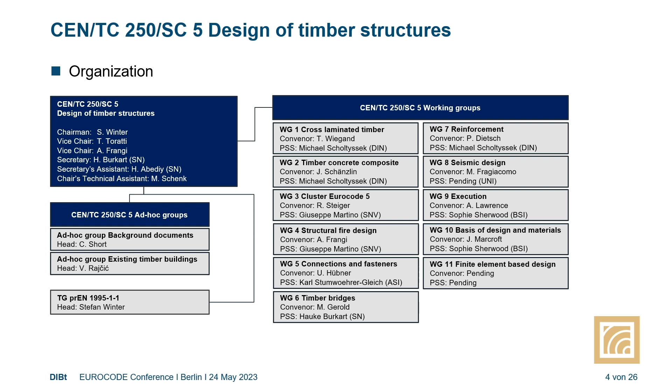Finally, we have an ad hoc group about existing timber structures. You heard about that in Nick's report about 1991, existing structures. At the same time, working group 2, under the convenership of Mr. Lang, is dealing with existing structures, and we are supporting this, of course.

As a summary, in total the Eurocode 5 family has 5 parts. The new ones are part 3, timber concrete composite structures, currently available as TS 19103, which will now be transferred to 1995-1-3. We have part 2, bridges, and a new part 3, execution. The general rules and rules for buildings, the fire design, and the bridges were all revised.

What are the targets? Of course, harmonization with the whole Eurocode family. Timber concrete composites should be harmonized with Eurocode 2 and Eurocode 4, for example, in some aspects. And of course, we have to mirror the tremendous development of timber structures in the past 30 years.

It's related to the size of the buildings. We nowadays create high-rise timber buildings with a height of 100 meters, actually built. The total size of timber buildings is rising, with a lot of multi-story flats, for example, built in timber nowadays.

Therefore, we need an extension and revision of several rules for timber design. In addition, we want to improve the interface between EN 1995 and product standards. This is of major importance for us, and I will come back to this a little later. Of course, same targets as everywhere: reduction of nationally determined parameters and alternative design methods, and finally outsourcing very specific design rules from the main text body to normative annexes, to make it easier to navigate — also a part of ease of use.

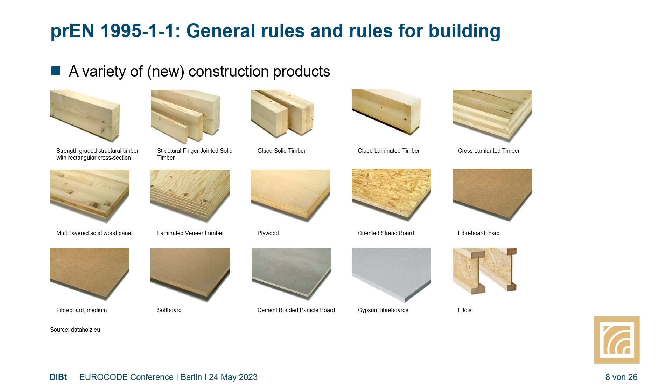Compared to steel or concrete, it's a little more complicated. In addition, there's been an enormous development in the connection sector.

We have not only smooth nails or ring shank nails, but a high number of different types of screws nowadays, fully threaded, not fully threaded, etc. Of course we also have dowels and bolts, as we had in the past. But there's a high variation of connections, connectors, nails and screws available on the market, and we need design rules for them.

In addition, and that's nice, we have a revival of carpenter joints. Why? Because especially in the timber sector, we have a really high amount of CAD and CAM-based manufacturing. Based on CAD and robotics, we are able to produce very precise structures, and therefore we are nowadays again able to use these connections, which are no longer handmade — they are produced.

This all leads to a high amount of new content, and unfortunately I'm not able to go through everything today in detail as some of our colleagues did. It's too much, so I would like to stick to the principles and some examples of the new content.

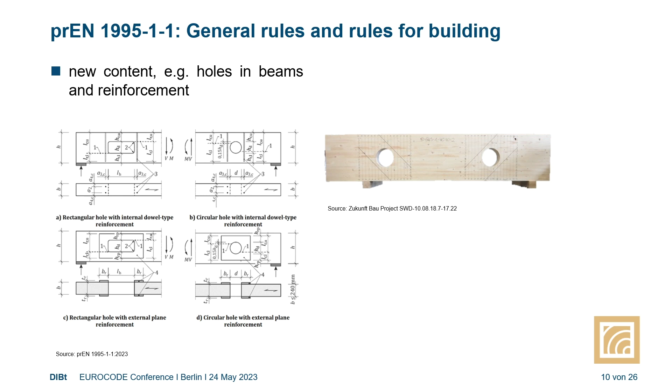As you have seen before, we have an increase in the size and height of buildings, and therefore you end up with more complicated structures to take lateral loads. You need a combination - CLT walls combined with timber framed walls, and often with concrete shafts and staircases out of concrete. You have to combine that, and you need some rules for it. That's what we tried to integrate.

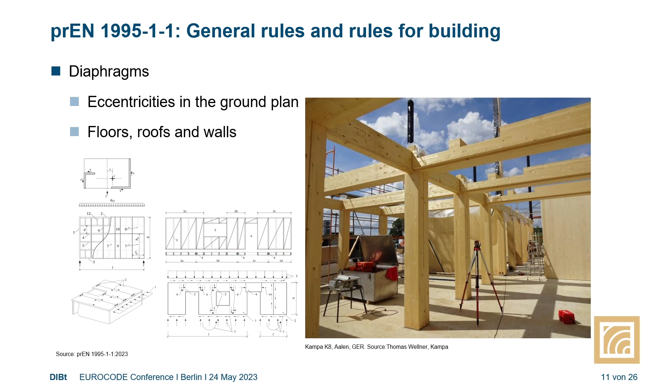We outsourced some content, especially to normative annexes. For example...

Foundations with timber piles - that was a special request, not from Germany, but from our friends from the Netherlands, for example, or from Italy, because they have foundations like that in their cities sometimes up to now. And for example, nail plate structures - these design rules are mainly used by software companies writing design programs or specialists dealing with these structures. So we moved it out from the main text body and put it in a normative annex, because as you know, the Eurocodes are implemented finally in different countries, and it's a different process. But if the annex is normative, then normally it's also valid under the application of building regulations.

Let's leave part 1.1, the normal temperature design, and come to fire design. Again we have, as an example, cross-laminated timber - a mass timber product built up of crosswise layers of boards. That's why the charring behavior is a little different compared to solid timber or glulam. That's what we have to take into account in fire design.

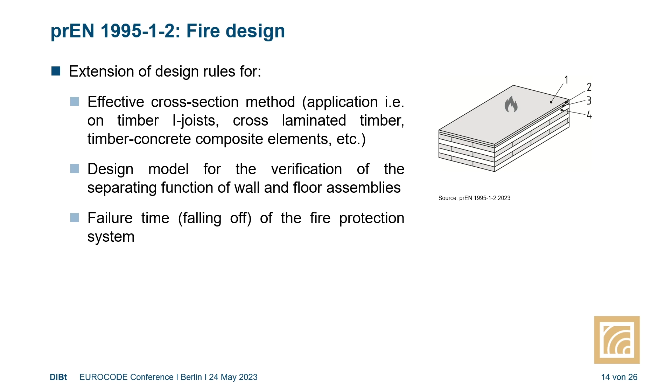We had a number of revisions of design rules. Charring, for example - we have this famous step model, especially valid for cross-laminated timber, because layers fall down and then you have preheating of the next layer, and the charring rate is increased for a certain time span, then goes back to the normal charring rate. This is now integrated. We have an update of timber frame assemblies. Connections in fire also now have design rules for 90 minutes fire resistance, which was limited before to only 60 minutes. And detailing for the case of fire was improved, as well as the design of timber structures exposed to physically based design fires.

This connects us now to what Nick mentioned this morning. Annex H in 1991-1-2 gives the fire loads, and Annex A in 1995-1-2 provides the design rules under natural fire exposure.

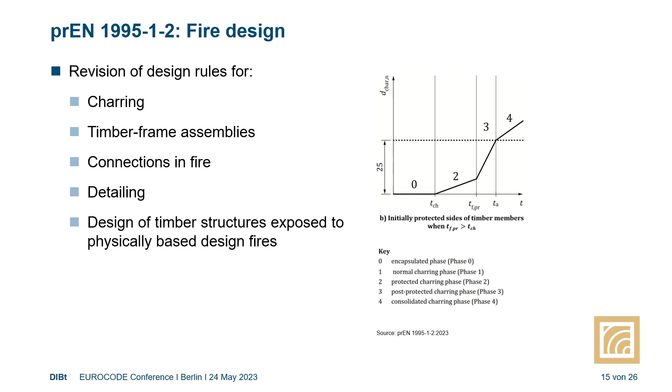Timber concrete composite structures. As mentioned before, this is a high increase. We use it mainly for wide span floors, sometimes also for walls, but mainly for wide span floors in offices, in kindergarten, in schools, etc. And of course also in multi-story dwellings.

Especially, they provide also a very good fire protection because you are producing always a complete non-combustible layer, and then the next layer of timber is following again.

Sometimes built on site. These are pictures, quite old pictures from Berlin, from Esmarchstraße in northeast of Berlin, where one of the first multi-story buildings in timber here in Berlin was built. So sometimes on-site, very often nowadays also delivered as a construction product, prefabricated in a factory, and then coming to the building site, the whole element. And with the typical technology of concrete, then the gaps are closed by screed, and that's it.

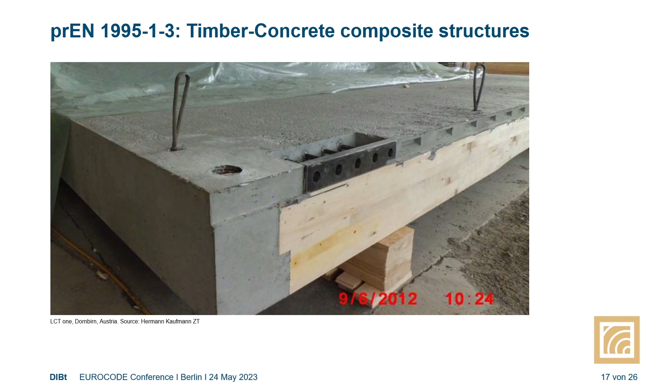We have already a pilot stage based on TS 19103. We give there the load carrying capacity and the slip modulus of the connections with dowel type fasteners, bonded in rods or notch connections. There is a modification of creep coefficients for composite action and slab systems and in beam systems, and we have also a calculation method for the effect of inelastic strains and some other hints for detailing.

Personal hint: you have to use the correct concrete, not the cheapest one you have available. So, of course, you need also a very good concrete design so that you have low creep, for example, and therefore low deformation. And if you build this, it's not only necessary to have knowledge in timber structures, you also need a good knowledge in concrete structures, of course.

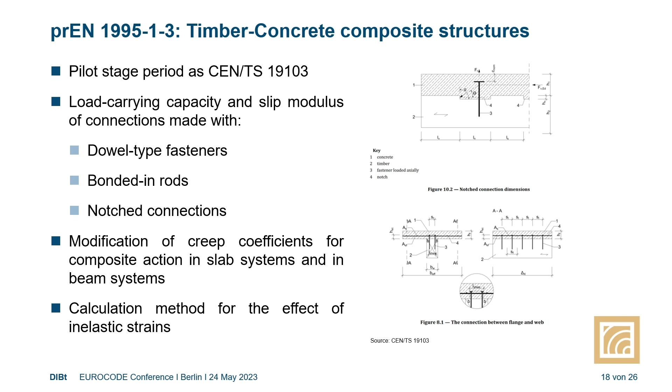Bridges. Well, we have some very old timber bridges in the foreground. You see a more than 150-year-old railway bridge in Benneckenstein, which was a repair situation here. But we have a lot of modern bridges as well, out of timber, especially in the alpine area, but also more and more in other areas.

We extended the design rules for durability and detailing because moisture is a bigger enemy than fire, to be honest, for timber structures. And that's why you have a lot of detailing now also in the Eurocode to provide dry timber structure for a long lifespan.

We have new design rules for deck plates and also first time for integral bridges. And we revised the design rules in the bridge part for timber concrete composite, of course, in relationship to 19103. We integrated laminated veneer lumber, vibrations and damping, and also some additional fatigue rules. By the way, for fatigue, we have now also a chapter in part 1.1, because if you think about the high-rise buildings, they also have sometimes fatigue design situations, of course.

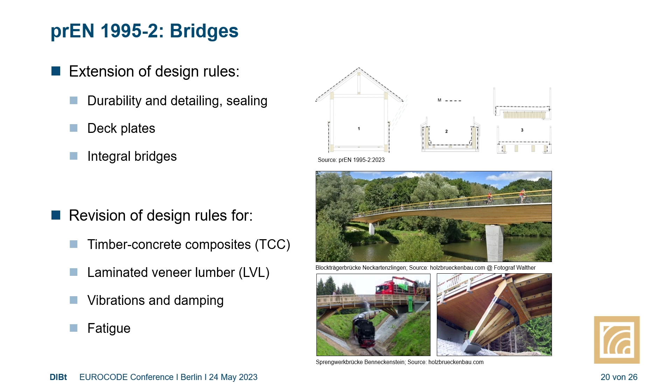Execution. Not available before. Now, well, we had some very small part of execution rules in part 10 of part 1.1, and we agreed at the beginning of the work in TC 250 that we will put out all the execution rules from the main parts of the Eurocodes. That's why here now 1995-3 execution, where you will find rules for the tolerances in connections, for the tolerances for member dimensions, the tolerances of erected members and moisture control.

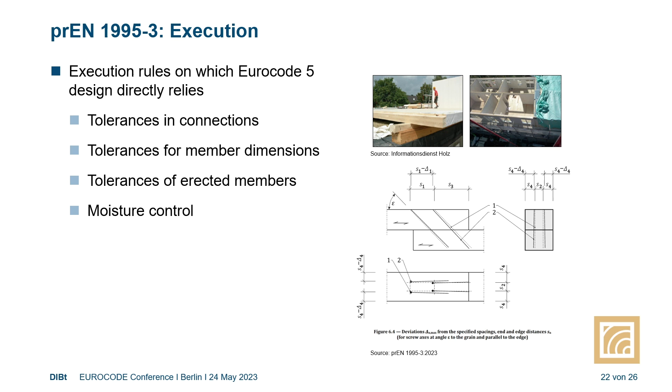Finally, that's the same with the material. We have to ensure on the building side that what is designed is built and that the design fits to what is built finally. And therefore, we give, of course, the rules in the execution standard.

So, coming to the end, again, a conclusion. You see 5 different parts in future, 2 new ones, 3 revised ones. And I would like to end a little bit with a hint to a discussion which is, I think, always ongoing. And that's a discussion of number of pages.

Is ease of use related to a reduction of number of pages? I think the answer is definitely no. What you have seen, we have a really enormous development seen in the last 20, 30 years in timber structures, based on a lot of research, based on a lot of additional practice. What we want to do is describe state of art. And if the state of art developed in such a way, you need a little bit more pages to describe it. I have no other idea.

And that's nothing to do with ease of use. Of course, in addition, we agreed that the first 10 chapters of all Eurocodes have the same numbering and the same heading. This is also part of ease of use. Those who are not doing steel design on a daily practice, they know they find the information in the same chapter in Eurocode 3 as well in Eurocode 4, 5, 6, etc.

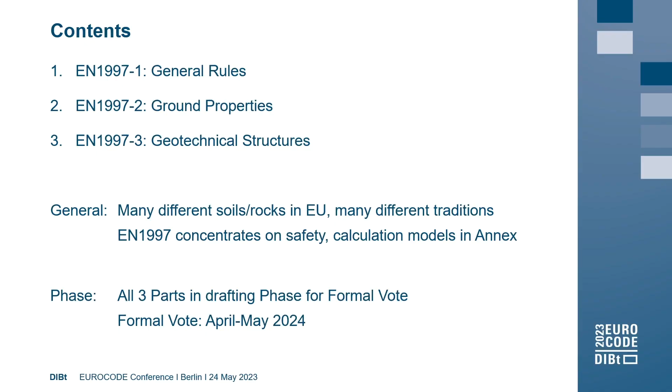Also the ways to compute your safety, the different calculation models, are different, and therefore we concentrate on safety. We have a lot of calculation models, but they're in informative annexes. At the moment, all 3 parts are in the drafting phase for formal vote, and at least the first 2 parts will have a formal vote in April, May next year. Part 3 probably comes half a year later.

The main changes in Eurocode 7: in the old days, we had 3 books on our desks - EN 1990, Basis of Structural Design, I must say, also geotechnical. Part 1, dealing with the general rules and also with geotechnical structures. And Part 2, dealing with ground investigation and testing. In the new Eurocode, I think Paolo already mentioned it, we have on our computer, of course, 4 parts.

The first one is basis of design, structural and geotechnical design, as Paolo already said. Then there's a general rule part, a part 2 on ground properties, which has a different focus on how you derive your properties and is directly addressed to the designer, and a part on geotechnical structures with many calculation models in the annex. So there's 4 different parts.

And then, of course, what is it? It delivers you a toolbox, as given here, for the designer, and in that toolbox are the 4 parts. But what you want with it is to get your structure ULS safe. In SLS, your deformation should not be too big, because that's very important for the geotechnical engineer. But also, it should be durable, robust, and sustainable - these aspects, as the others have already introduced, are also in Eurocode 7.

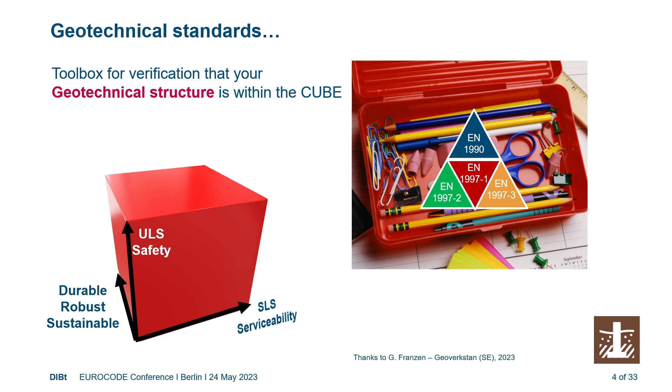So actually, it's not a 2D thing, but a 3D thing - it is a cube. And so we should take care with Eurocode 7 that our structure is inside the cube. Part 1, general rules.

Key changes. In the old version we had a geotechnical category, and it was not completely clear what it was. The difference is: for structural items you have a consequence class dealing with function of the structure. Whereas here we have a second component, because there is the soil. You can't choose it, it's there, and you have to look at the risks.

Representative value determination. Soil parameters are very different, and if you do tests, the range of parameters can be widely spread. So we adjusted a way to get to representative values, by engineering judgement or by statistics. We must also be prepared that in the future we'll deal with huge databases of test results.

Groundwater, the hidden killer of lots of structures. It's an important issue also here in Eurocode 7 Part 1. And then safety numerical methods. It was already mentioned in other Eurocodes, but for geotechnical we do a lot of continuum mechanics, and there we need extra rules.

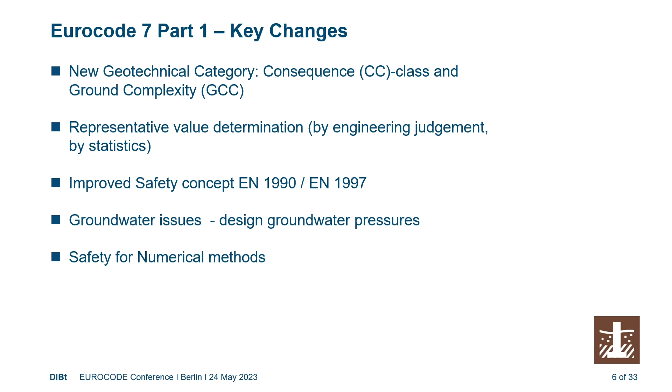So the first one, geotechnical categories. We made a concept of a consequence class, described in Eurocode EN 1990, and a ground complexity class. The ground complexity class is a function of the ground. If you have a difficult ground, a quick clay, or a very soft one, or whatever, you end up in a different complexity class. The two you combine, as you can see in this matrix: here's your consequence class, this is your complexity class. Lower, the simple ground, say sand, and higher a peat or fissured rock or something.

Combining them, you have a geotechnical category 1, 2, and 3. Those three things determine whether you have to do lots of ground investigation, or how you have to validate your calculation models, your monitoring, and it's also connected with EN 1990, with design check levels and inspection levels and so on. So in this case we have increased this phenomenon of geotechnical category compared to the previous one.

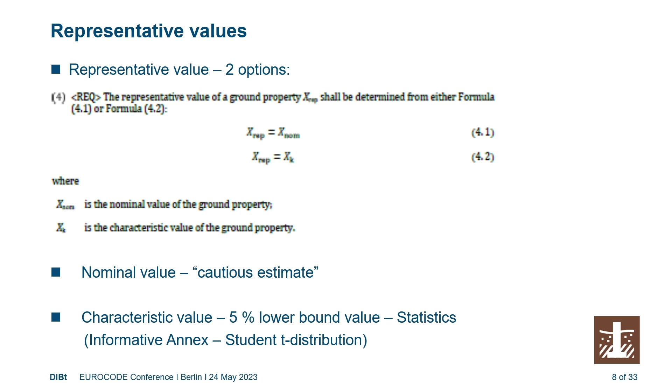But for a slope, it's different, because the permanent action of the slope itself, the mass of the material, works as a load, but it also works as a resistance, because the bigger the mass, the bigger the resistance. So luckily there is VC3, where the factor on permanent action is 1 and on variable action is 1.3.

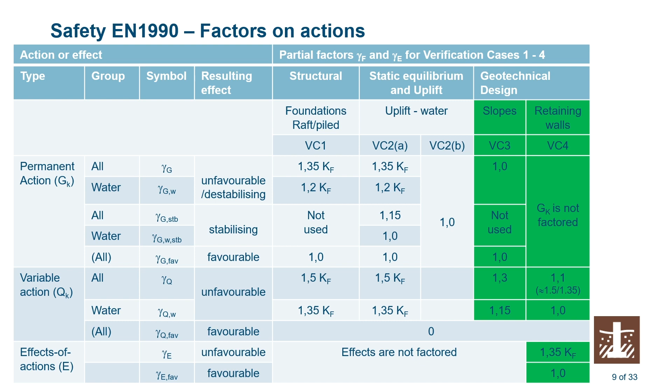So all the permanent actions are not factored. The variable action is factored by 1.1, which is the difference between the 1.5 of variable and the 1.35 of permanent. Then at the end you have a result, an effect of actions, and you factor it by 1.35. So that helps us in geotechnics very much to analyze our structures.

Material factors. We have two sets of material factors in Eurocode 7. One set is all 1, which goes with VC4, which I just discussed, and the other set has material factors, and it goes with VC3, where you have no permanent load factor, but you use material factors to make the difference. And of course there is an adjustment for consequence classes, as also in EN 1990.

Groundwater is very important for us. It's important to have the right value of your groundwater level. What you normally get is some kind of readings, and you don't know what to take - the upper one, the lower one, or something in between. We have written a chapter on this, on how to derive the representative values of a groundwater pressure.

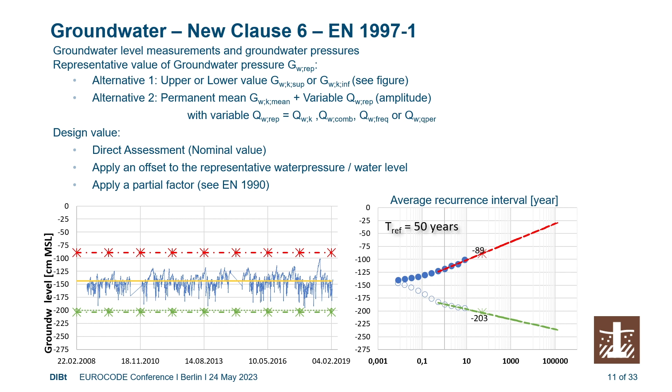You can do it two ways: take the high one or the low one, or take the average and take the amplitude. Those are the two possibilities. Then you go for a design value. You can do that directly if, for instance, there's a dike which cannot overflow and you know that's the maximum. Or you can apply an offset, or apply a partial factor. Of course there's some statistics behind it, and that's described.

Another important point is how to deal with numerical methods. We had quite some discussions in Eurocode 7 about how we would tackle that, because normally we work with analytical values and we know where to put the safety factor. So we ended up with two possibilities. One is dealing with input factoring and output factoring - you make two calculations.

For instance, with a retaining structure with input factoring, what you do is reduce the strength of the material until failure occurs, and the reduction is your safety margin. The other one is output factoring.

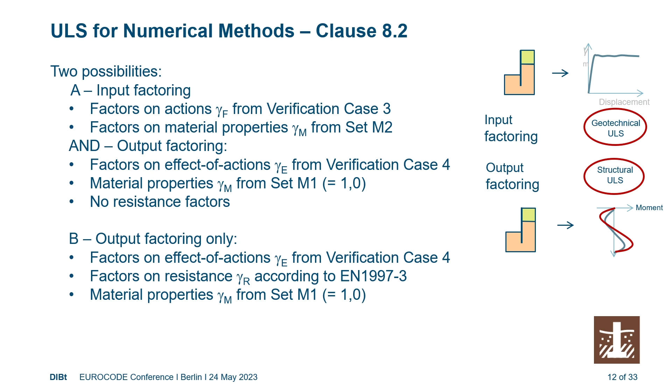It's actually verification case 4. You put all the material factors on one, calculate your bending moment in your sheet pile, and put the resistance factor on your moment and effects of actions to derive at it. Also, you can do it by output factoring only, but then you need an effect-of-actions factor from verification case 4, plus an extra factor on the resistance. So those two options, A and B, are available.

Ground properties, Eurocode Part 2. A key change is that in the previous version, we had a description of testing with references to testing standards, and from that there were some annexes on how to derive your properties. What we did here is recognize the designer needs the properties - he's not interested in the test, but wants the property and how to get it. So we have a property like stiffness and how you get it from a triaxial test, a CPT, or another test, all in the same ballpark. That's how it was organized.

Furthermore, we have three other chapters: one on the ground model, which I'll show next, planning, and ground investigation methods, with a brief description. Here are all the chapter headings with the various properties.

The ground model is something new. It's more a concept than a real model. It gives all the information you need when you are going to design a geotechnical structure. So what you need is the geodetics - how your structure looks, if you have a slope on the left side - but also the results of the boreholes, the CPTs, everything. Based on that, you can make a schematization and characterization of your ground.

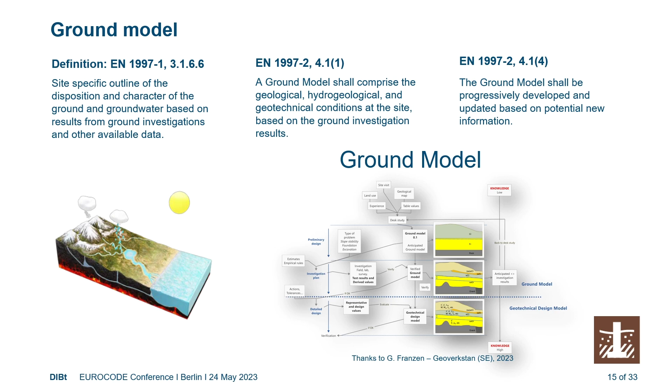You start rough, but if you have more investigation points, you see different layers existing, and you get the properties in. This is something developed in the design - it can be a report, a drawing, a database, but it's a conceptual thing you need before you do your analysis.

Then the derivation of ground properties - as I already said, there are six or seven chapters with parameters, all similar. We've given tables on how we derive these properties from soil strength tests. So this is the peak effective cohesion - what kind of test, where you can find it, and some comments. There are also correlations for indirect derivation - so if you have a CPT, you measure the cone resistance, and from that you have a formula to get your friction angle. That's given in all the annexes, so it's very handy.

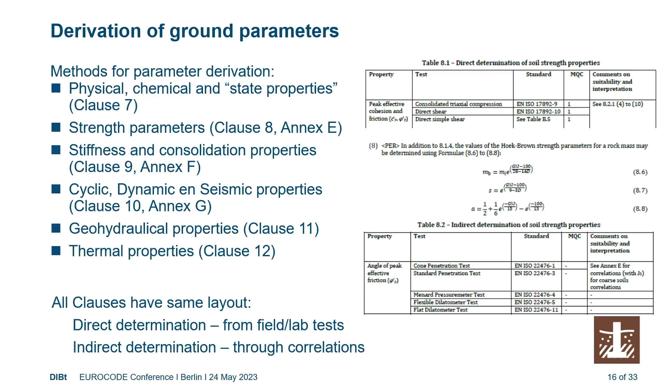Then we come to Part 3, which deals with geotechnical structures, and we have quite a number of new ones. We've introduced pile groups and pile rafts in clause 6, reinforced fill, soil nails, ground improvement - improving the properties of the ground - groundwater control, and rock bolts, all new. We also completely updated slopes, spread foundations, piles, retaining structures, and anchors.

I will just go briefly through the structures. Slopes - the engineering is quite common, and it's one of the things we all do the same way in Europe. So that's great, it's harmonized, it works. We have only one design material factor approach - we use VC3 with material factors, and that's it.

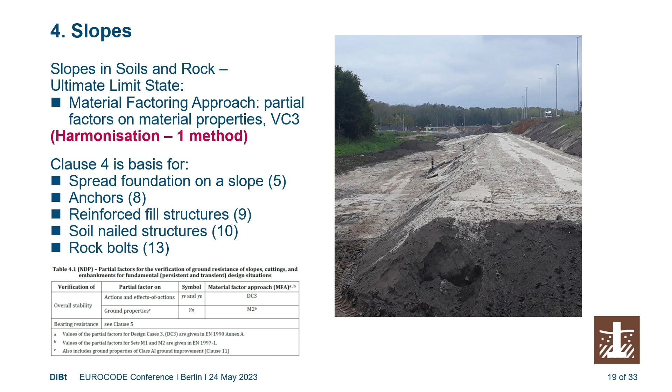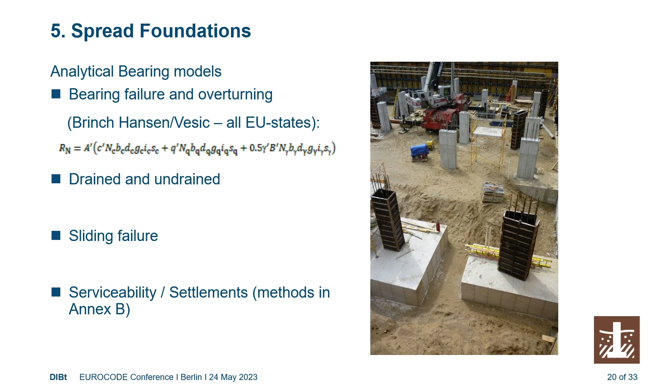Spread foundations - the good thing is, like concrete slabs on the ground, we have one bearing capacity formula which we use everywhere, so we put it in the main text. We look at drained, undrained, sliding failure, and settlements.

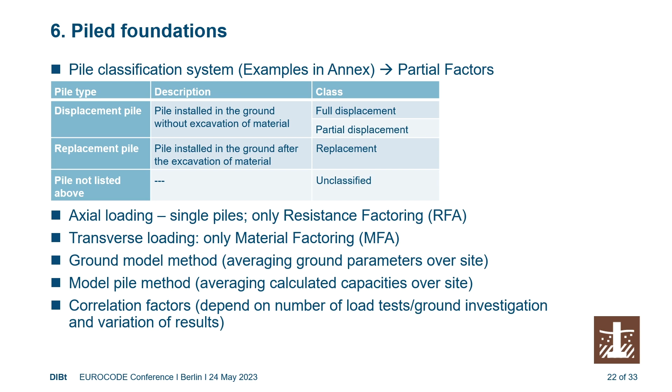A new topic is pile groups and piled rafts. We do the ULS verification with material factors and resistance factoring, and we have some models for bearing capacity in groups, and also a model for negative shaft friction.

Retaining structures - also there we have different models. There's analytical models, that's a beam with springs next to it, but also continuum models where you have finite element continuum models like Plaxis and so on to analyze it, and both are common practice nowadays. Some parameters for active passive pressures have different material and resistance factors. Often both checks are necessary.

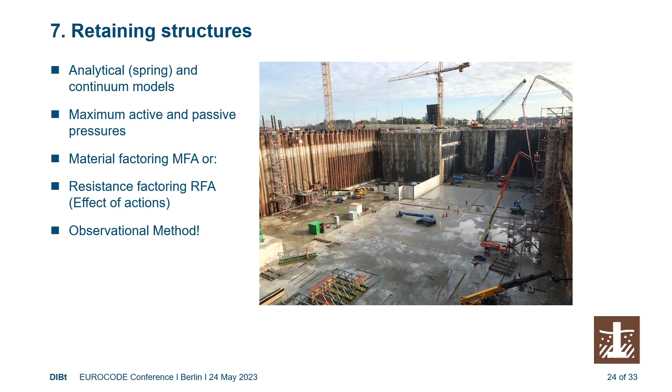What's also new is we have a section on the observational method. The observational method is a way to optimize your structure by looking in the design at different scenarios. You make different sums with different scenarios, and you say I'm going to monitor everything, and if my monitoring shows I have to do something else - for instance for a retaining wall, put in an extra strut or an anchor - I can do that, but I don't do that in the beginning. That way I can optimize my structure and make it cheaper. That's described especially for retaining structures.

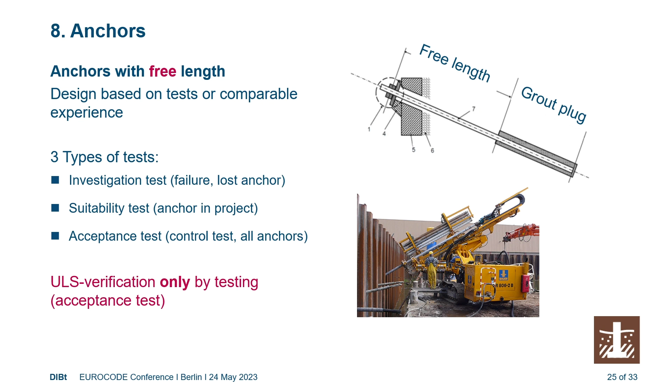Anchors are characterized as anchors with a free length. There's a lot, for anchors especially grouted ones, it's very much execution dependent, so all verification is in the end done by testing. Every anchor has to be tested with a proof load.

Reinforced fill structures - a new topic where you have these kind of terre-armée structures, concrete facing with anchors in the fill, or a geotextile which is bent back to take the load. This is now in the rules for designing them in Eurocode 7.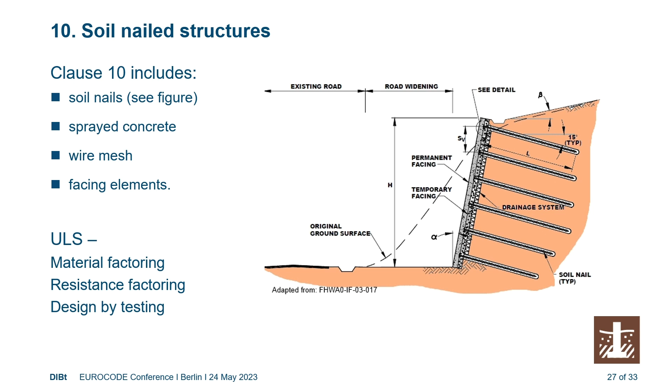Soil-nailed structures, similar, also to get a very steep slope with nails, with a covering of the face - again, now dealt with.

Another big chapter is on ground improvement, and there we have two different methods: diffused methods, where you completely fill up the ground with concrete, or you densify it or improve it. The other is a discrete method where you put columns - stone columns, sand columns, or jet grout columns.

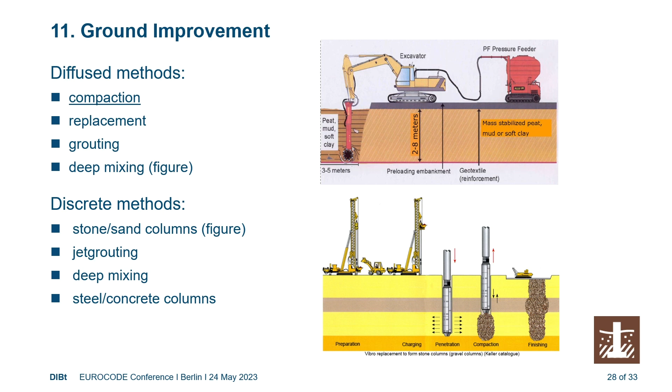Also design rules, and because there's also an overlap with piles - what is a concrete column and what is a pile - these things are taken into account.

Groundwater control, another chapter dealing with drainage, so pumping, getting water out, but also with sealing the ground by grouting.

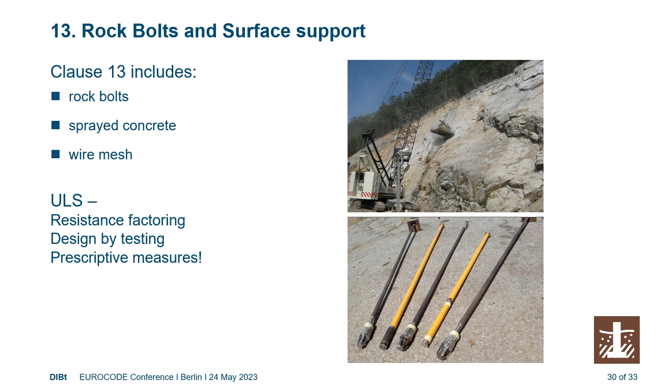And the last chapter is on rock bolts, to keep the rock surface stable with bolts and sprayed concrete, and wire meshes are also included there.

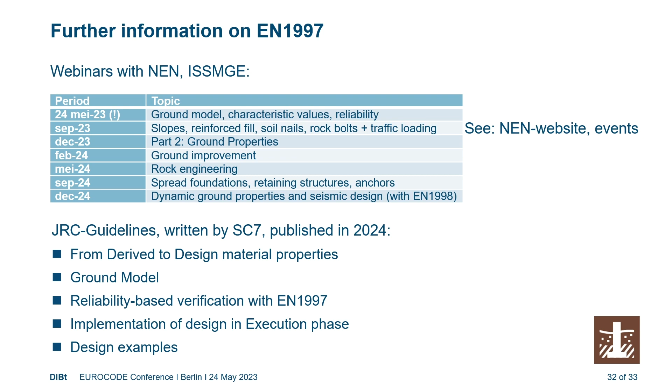And also, we talk a lot about monitoring plans and execution plans and things like that, but how does it work in the execution phase? We have a lot of examples where that is given. And lastly, we have made a lot of design examples to check the code. That's where I want to finish my lecture. Thanks very much.

Thank you, Mr. Van Seters, for providing us with a toolbox for geotechnical design. Natural disasters like the earthquake in Turkey and Syria remind us of the importance of seismic design and its consistent implementation. Philippe Bisch will give us an update on the latest Eurocode developments related to earthquake resistance.

Thank you. So I'm very glad to be here again in Berlin, and also to listen to my colleagues, because, as you know, Eurocode 8 complements the other Eurocodes. So we have to know every other Eurocode to be able to develop Eurocode 8.

So I've been involved in the development of Eurocode 8 since the beginning of the ENV stage. It was in the last years of the 80s, so it was last century. The interest of that is I could follow the development of Eurocode 8, of course. The physical basis are still the same.

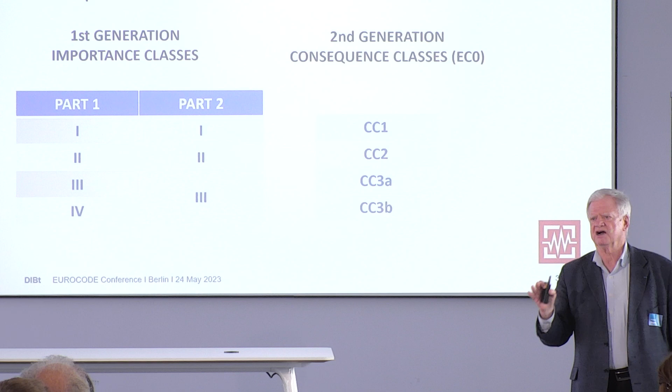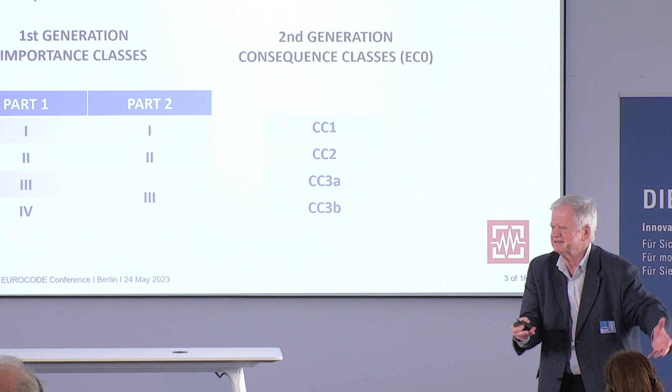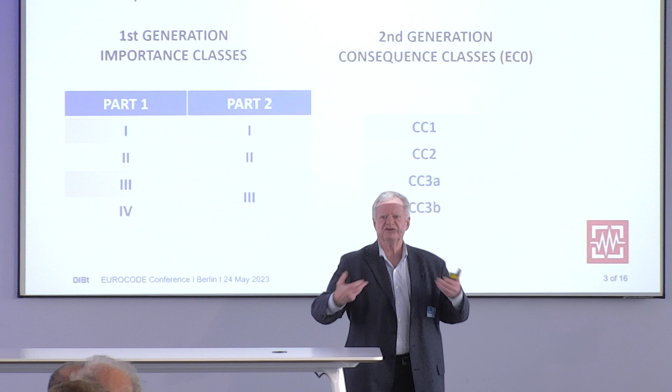One of the problems of Eurocode 8 is that it is very often, in many countries, directly in relation with regulation. So on one side you have Eurocode 8 and the national annexes, but you also have all the regulatory texts that exist. This is a constraint, because we cannot only develop what we want; we also have to take into account the final decisions taken at a political level, mainly related to safety. It happens that in many legal texts you have a clear definition of these categories, so we could not change them, because we cannot change the law. We can only change Eurocode 8.

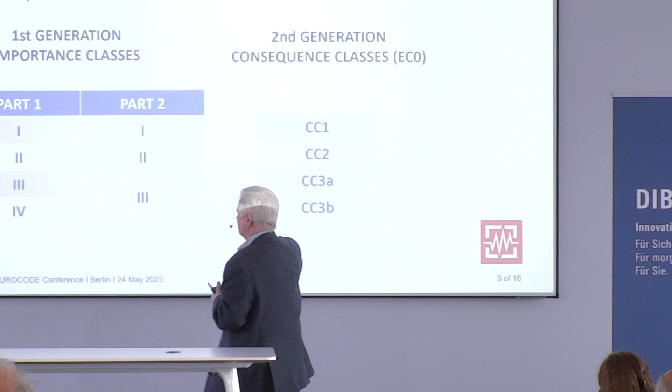So what we have done, just to mirror these categories, is to divide CC3 in two, which was authorized by Eurocode 0. We decided to divide CC3 to cope with categories 3 and 4. I insist on this: we are working in a legal environment, and we are not only talking of technical text, we also have to look at what happens after in the different member states. Of course it's not the same if you look at the legislation in southern countries or in northern countries. It's very different, but it has consequences.

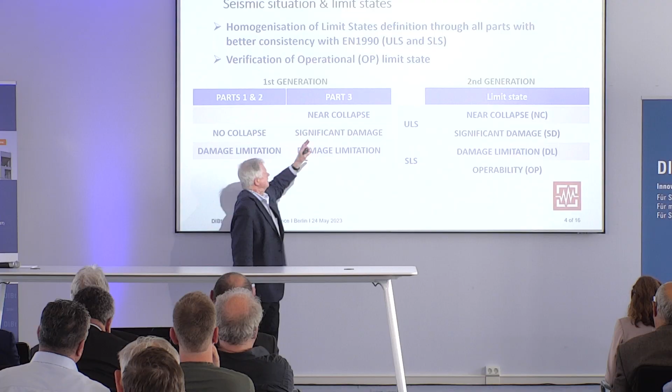Another thing: the Eurocode 8 family was not completely consistent. If you look at different parts, the limit states were different between Part 1 and Part 2 — Part 1 is for bridges and buildings, Part 2 is for bridges. For new structures we have others, but mainly those, and Part 3 is for assessment. Part 3 was developed since the beginning, at the ENV stage, for the assessment of existing structures in seismic situations. This has existed for a very long time.

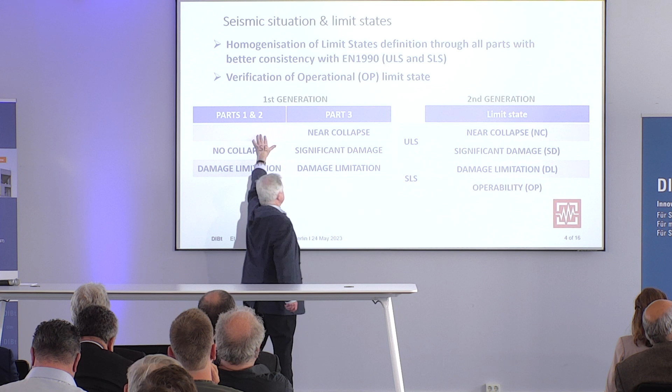We had defined in Part 3 three limit states. This one is the same as this one, even if the name is not the same, and this one is the same, but this one did not exist. Near collapse is really near collapse; here, no collapse is not near collapse — you still have some margin, of course, for new structures.

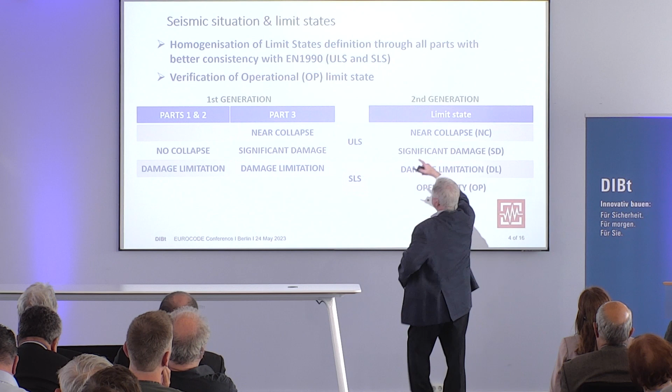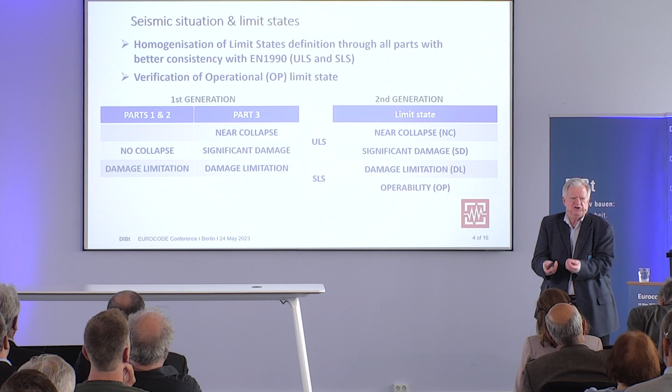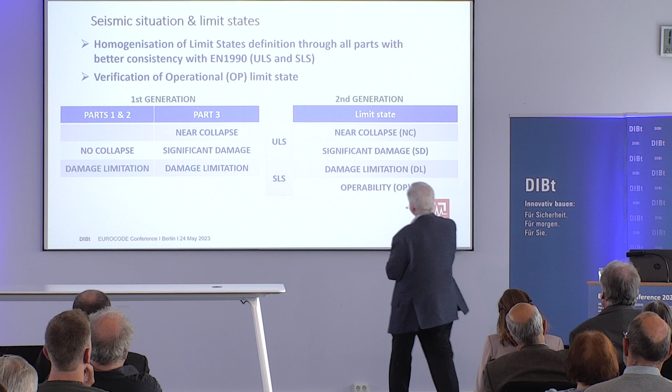So we decided to use the definitions which are better, those in Eurocode 0. And we have added another limit state, operational, at the request of some members, because sometimes for a certain level of earthquake you need to have operation for certain parts of a hospital, for instance — you need it for a situation of crisis.

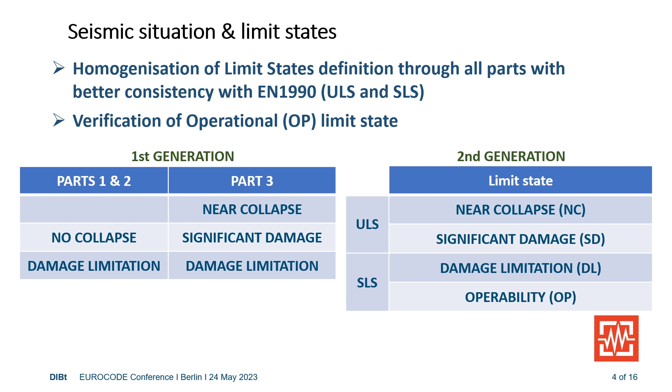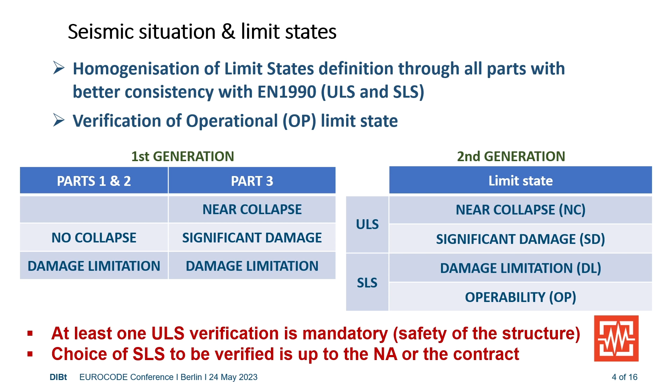So we have added that, and then we have all those limit states, but we are clearly referenced at ultimate and serviceability. Of course, all that is related to safety of people and structure is in ULS, and it is mandatory to verify one ULS, mainly this one. The others are optional — it may depend on the type of structure, it depends on the member whether they want to verify these types of limit states. This choice is in the national annex, or it may be in the project.

We have tried to concentrate Eurocode 8 only on the technical issues, and all the safety choices are left to the member, whether in the national annex or in legal text, depending on the member. So you will find only technical solutions, and to help members choose their safety level, you have different levels of choices, but which are clear. This was also a help to reduce the number of NDPs.

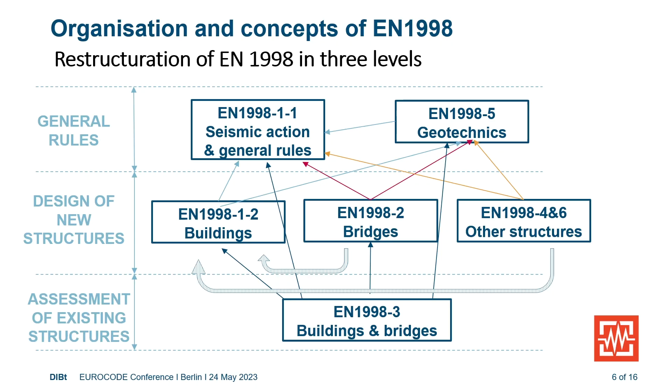We have also realized, now that we are internal in Eurocode 8, that the organization was not so consistent. In the previous generation, you had the seismic action, definition of seismic action, and the general rules together in part 1, so general rules and buildings. Then we had bridges and the other structures in part 2 and 3.

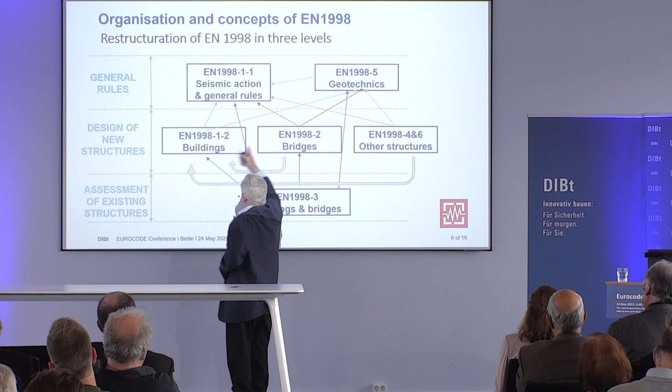What we have seen is that there were many repetitions, for instance, between part 2 and the others, and part 1. And sometimes there were even inconsistencies. So making this new organization was also a way to decrease the number of pages and to avoid the repetition, and of course to have everything consistent between the different parts.

So we have decided, and it has been accepted by TC 250, to divide part 1 into 2 sub-parts. But if you want to have the previous part 1, you take the two, glue them together, and you have part 1.

The interest is we have removed from the other parts what is dealt with in the general part. So it is a simplification. Of course, it is consistent.

And then you have 3 levels. You have the first level, mainly part 1.1, and also part 5, because we have put in part 5 all what is related to geotechnics, geotechnical structures, foundations, etc., which is common to buildings, bridges, etc. And we have kept in the other parts only what is really specific to the different types of structures.

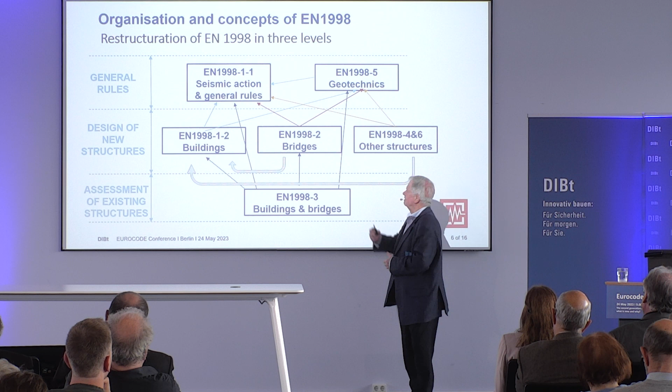We have put together part 4 and 6 because there were relatively light standards, and there was no real sense to have them separated. And part 3, of course, is important, except that in part 3 we have added bridges.

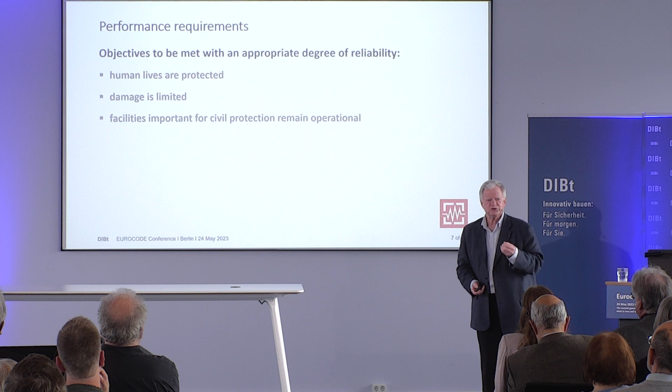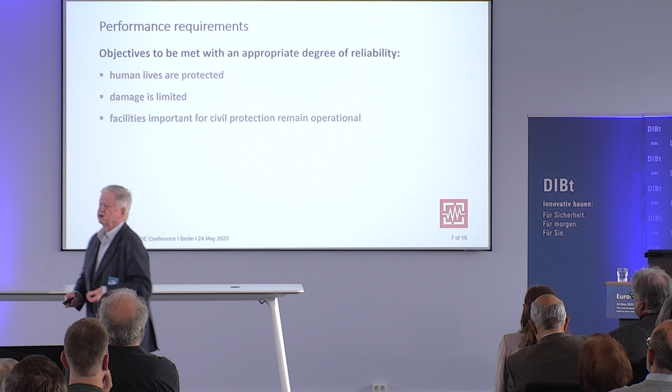What are the fundamental requirements for Eurocode 8? Of course, it is to protect human life, but also to limit the damage, because you have seen the different earthquakes on TV, and you can imagine that the loss is not only, of course the most important is human life, but not only. You have seen also the economic disaster.

So we also have to protect somehow the structures themselves. And of course, we have to take care of civil protection, because when you have an earthquake, you need civil protection. There are other considerations, and it is open.

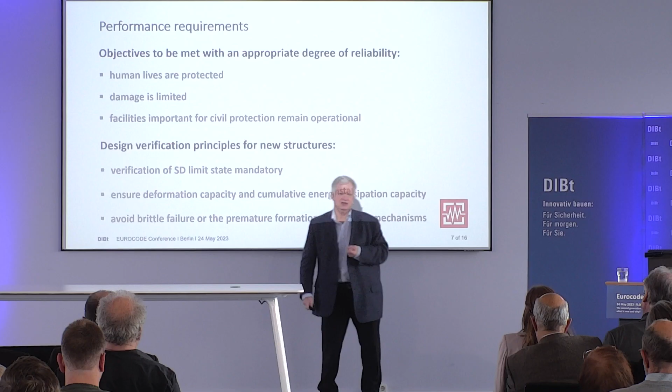Now, the design verification principles have not really changed since the first generation, because it's basic physics, I would say. So for new structures, for existing structures it's a little more complicated, but for new structures we have the verification at significant damage. Beyond this, in the development we are also making sure we are covering near collapse, but it is not a verification to be done by the designer.

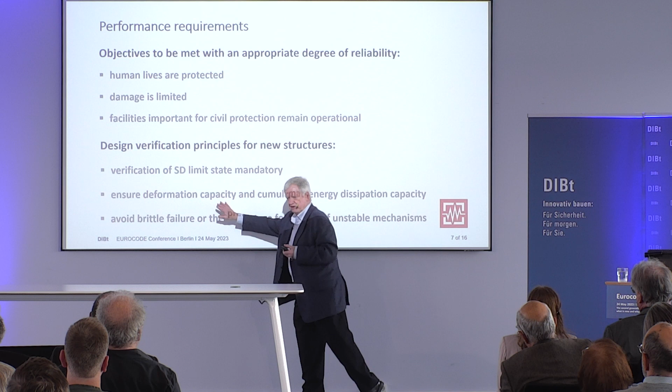So we are, as I told you, using frankly the post-elastic behavior, in the plastic domain. I will come back to the ductility classes, but the basis of that is to ensure deformation capacity, in cyclic conditions, and cumulative energy dissipation. Because the interest is that when you have cyclic loading in the plastic range, you dissipate part of the energy which comes from the earthquake. And this is very interesting in terms of solution and cost.

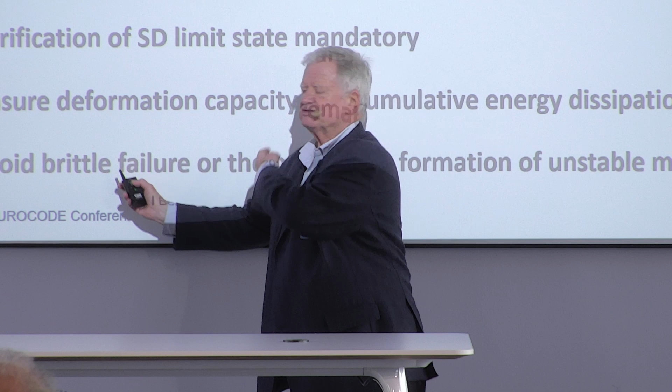But doing that, to obtain this result, we need to avoid brittle failures and formation of unstable mechanisms. Now, the definition of the action is not for the designer, it is for the national annex or for the deciders, for the legal documents. So the first way to, you have seen the different limit states, and of course to each limit state you have given a level of seismicity to verify. It's not the same.

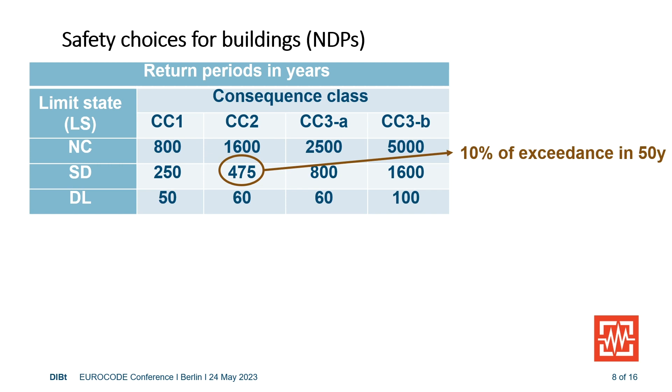You have also the consequences class, and this table of return periods which is proposed. It's an NDP, one of the choices which can be made, but it's only a safety choice. For the SD verification of normal buildings, CC2, these are the buildings close to us, we have this return period of the action, which corresponds to a probability of exceedance of 10% over a design service life of 50 years, which is very high. But you should realize it is a compromise between safety and cost. So we ask the designer to make the verification at this level of action.

But of course the code developer has to take care of what happens after. We do not accept to have collapse, a cliff effect, just after this value. So this is important. Of course it is transparent to the designer, but it is developed in the code.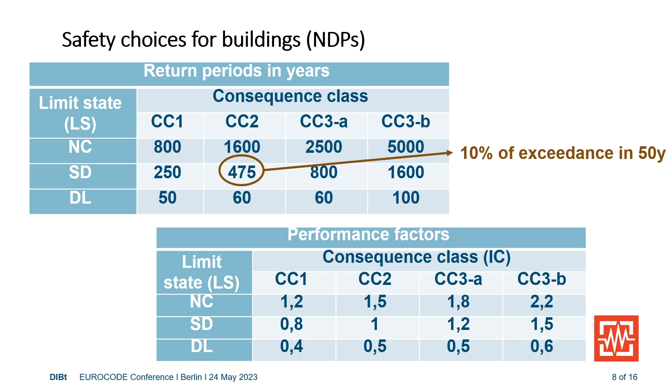Originally, for each category of importance we had a coefficient, but it was only related to the consequence classes. But we need to have also the action depending on the limit states we are considering. So in parallel, we have this performance factor, which is the same as the importance factor, but more general. It is equivalent, and the member can choose either one. This has been introduced because in some countries they prefer to define the return period than the performance. So people may choose what they want. Of course, both are NDPs.

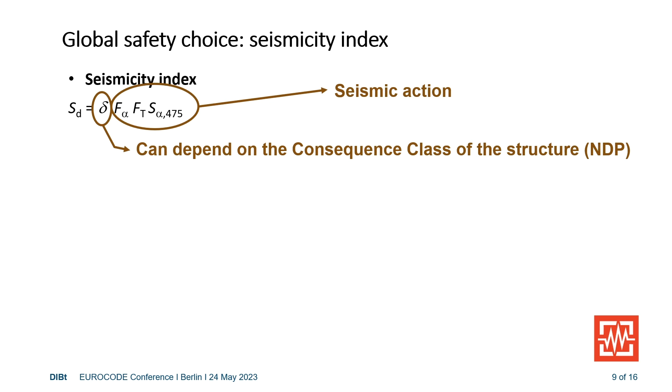We have introduced another safety choice, which is a seismicity index. In fact it defines a certain level of seismic action, and this has consequences in the verification and in the design. Part of it depends only on the seismic action, which is defined elsewhere, but there is this seismic index, which is the choice of the member. Of course the recommended value is 1, but it is not exactly the definition of the seismic zone. It's clearly an index, a seismic action related to the safety wanted by the member. So delta is fully in the hands of the members.

Once you have chosen delta, then you have the classes - this is not an NDP, because the NDP is there. So you have different classes, and the designs are related to these classes. The interest of that is that it is common to every type of structure, so it is relatively simple for the approach. Now people have to choose the delta.

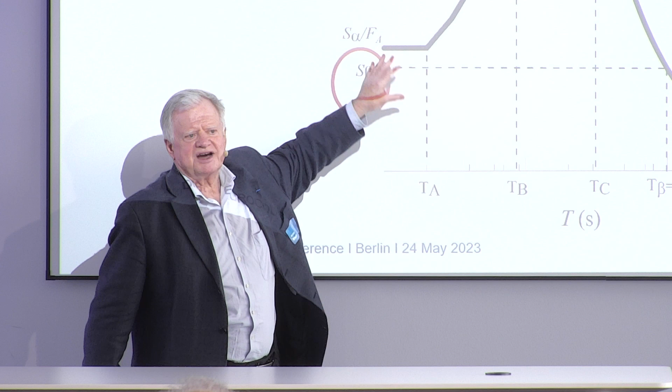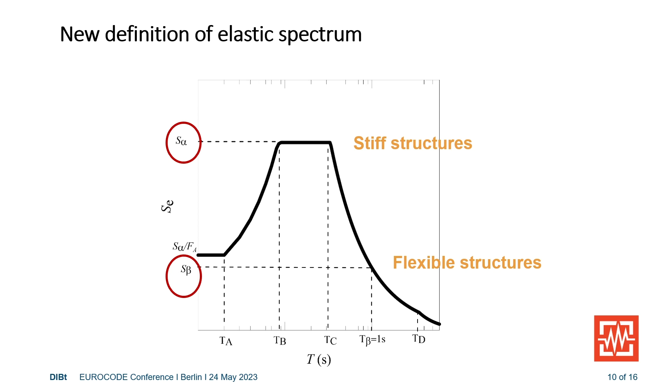But the main change is that before, the spectrum was fully anchored on the peak ground acceleration. But this is a parameter that seismologists like very much, but engineers don't really need, because we have no structure with a zero period, so it does not exist. So we have introduced two points, not one. One on the plateau, which corresponds to the range of very stiff structures, and another one at 1 second, which corresponds to flexible structures. So we have two anchor points and not one, and it is better defined for engineers.

Now, another important thing - I think I'm very long, huh? Oh, yes.

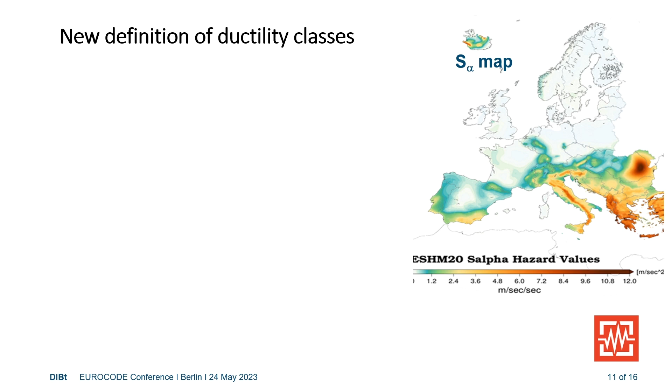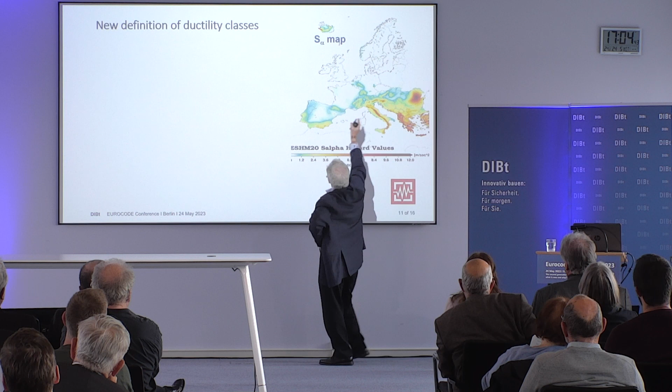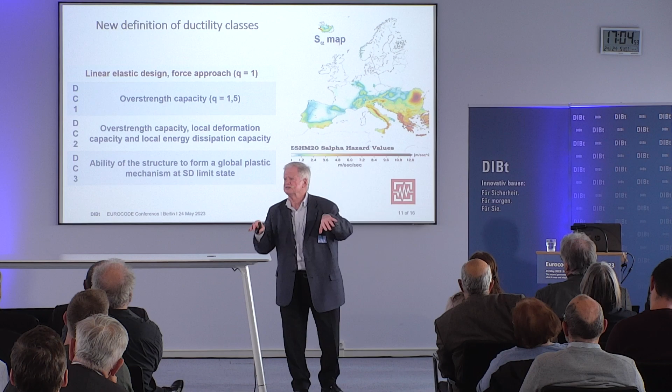New definition of ductility classes. Here is a recent map for the hazard in Europe, and you can see values S alpha, a map for the plateau of the spectrum. You can see that the high seismicity is concentrated in southern countries, Italy, Greece, etc. Middle Europe is moderate seismicity, and you have no seismicity or negligible seismicity in the northern countries. So the idea was to fit the ductility classes that we had to new definitions and new approaches.

So we have changed completely. Before we had DCL, DCM, and DCH. The new ones are different, so you can't confuse them - they are different. The only one which is similar is DC1, but here there is a main difference, because before DCL was recommended for low seismicity.

But it was general and it was not really convenient, because the risk in the structure is not the same. The criticality of the structure is not the same with respect to earthquake. So we had to make a modulation for the limit of use of DC1.

This is very new, and if you look at the limits defined with the seismic index, you can use this a lot, even in moderate seismicity regions, not only in low seismicity. This is advantageous because it's much simpler, because you just make a linear analysis and use the other Eurocodes. This is the basis.

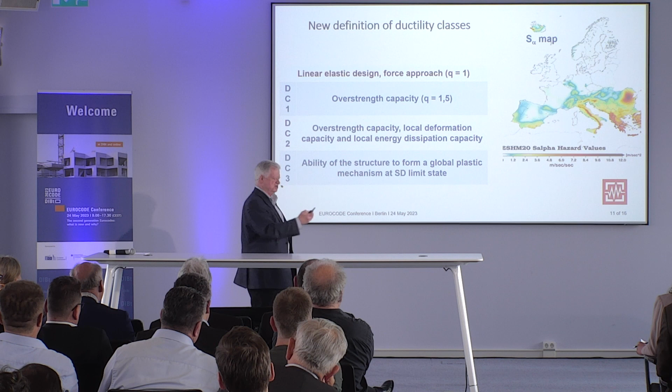So it's completely different. DC2's intention is to calibrate it to moderate seismicity, so it is not the same as the previous DCM. And DC3 is similar to the previous ductility classes M and H, with the difference that it is simpler.

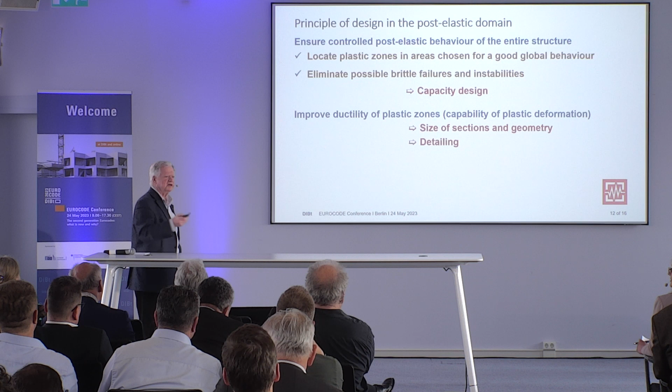For DC2 and DC3, the principle is to use ductile design, in the plastic range. The objective is to have ductile modes of deformation. So we locate the plastic zones in the structure, and we eliminate the brittle failure. This is the principle, and this is done through capacity design, but capacity design is only for DC2 and DC3.

So I'm just saying that, of course, there are choices which are made, and in each case they are based on compromises, because we always have to have a compromise between the risk and the cost, and also between force and ductility, between strength and ductility. It's not the same. You may have a lower strength but a higher ductility. So this is the choice that the designer has. It's open.

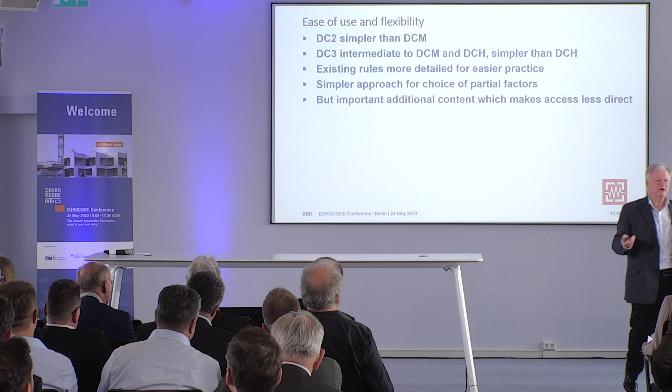Perhaps I'm too long, so I will stop soon. I will just say a word about ease of use. DC2 is simpler than DCM. DC3, the new one, is in fact intermediate between DCH and DCM, but it is simpler than DCH, because DCH was not so much used, as it was complicated. So basically the rules are the same, but they are more detailed and more explained to help the designer.

And we have also introduced a new method for defining the partial factors for materials, for instance for resistance. This new method simplifies the way to introduce partial factors in the national annexes. So there is a lot of simplification, in fact. But on the contrary, we have a lot of additional content in all parts. On one side we have simplified and decreased because we avoided repetition, but on the other side we have introduced a lot of new things.

But as was mentioned before, ease of use is not directly linked to the volume. Now we have introduced a lot of flexibility for members, so there are a lot of choices which may be made by members.

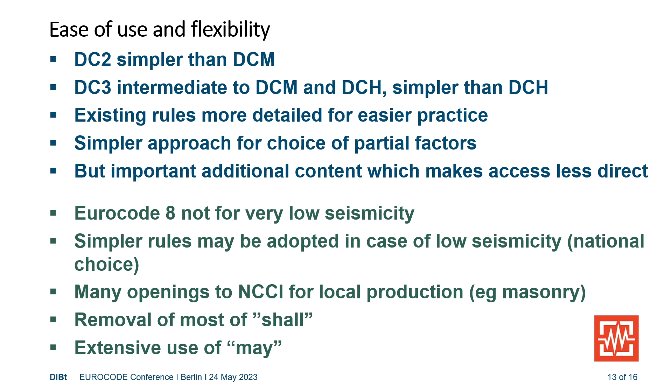First, you don't have to use Eurocode 8 in very low seismicity, because we consider that the Eurocodes are well written by our colleagues, and we don't need to do more. That's all, you just use the Eurocodes. Now, in low seismicity, there are many openings to introduce simpler rules, at least for certain types of common structures, which has already been done in the last generation by several members. So, of course, this is still possible.

We have removed everything which was too linked to local production. For instance, for masonry, there are openings such that there may be a complementary document to apply the principle of Eurocode to local production. But you have the minimum requirements, minimum strength, etc., that we have to take care of.

We have removed most of the 'shall'. So the code is basically written with 'should'. But we have also increased the number of 'may', so it's open to alternative methods. I think I have to stop. This is what you wanted to say.

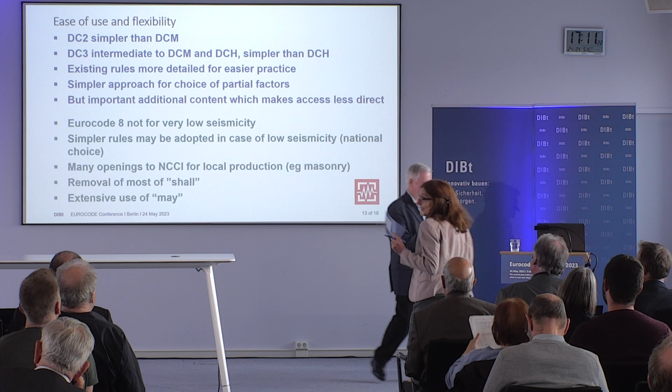The presentations are online, and I think we are only missing two slides.

Thank you very much, Monsieur Bisch, and thank you also for reminding us that the safety level is a choice, and hopefully an informed one.